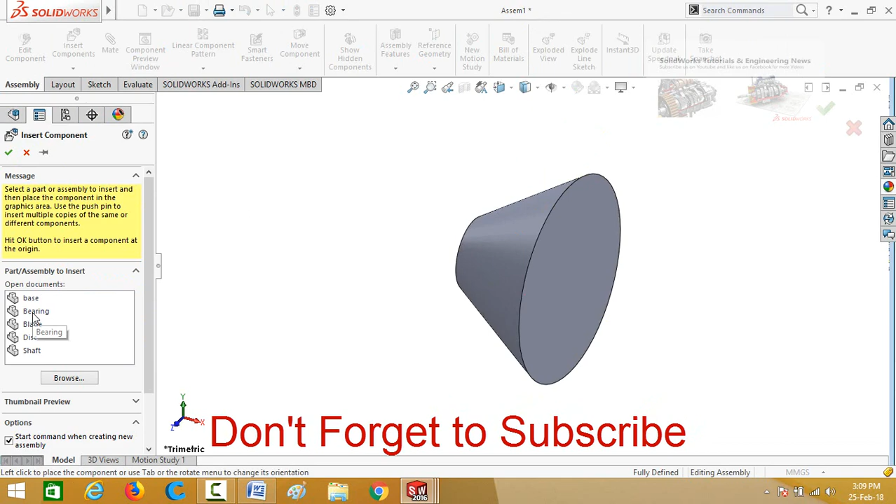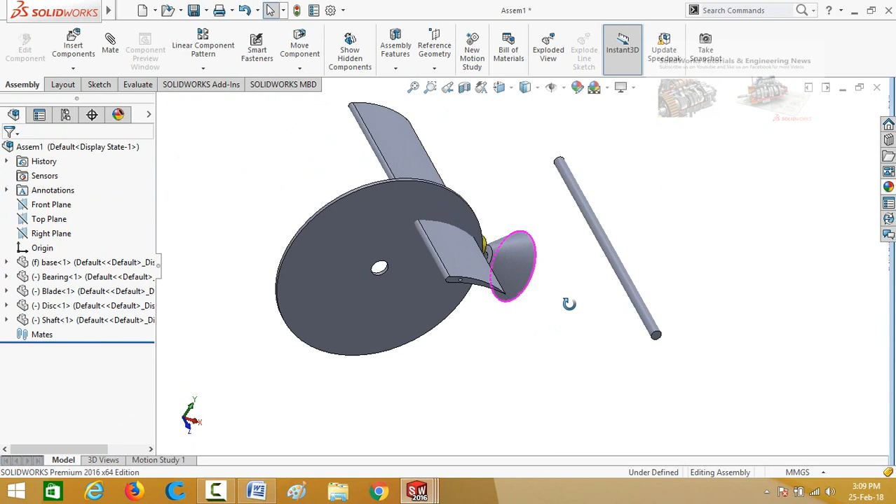Assembly, then import the rest of the parts one by one. Click on this cylindrical face of shaft and then select mate. Now select this cylindrical face of base and press this button to lock rotation. Now press OK button.

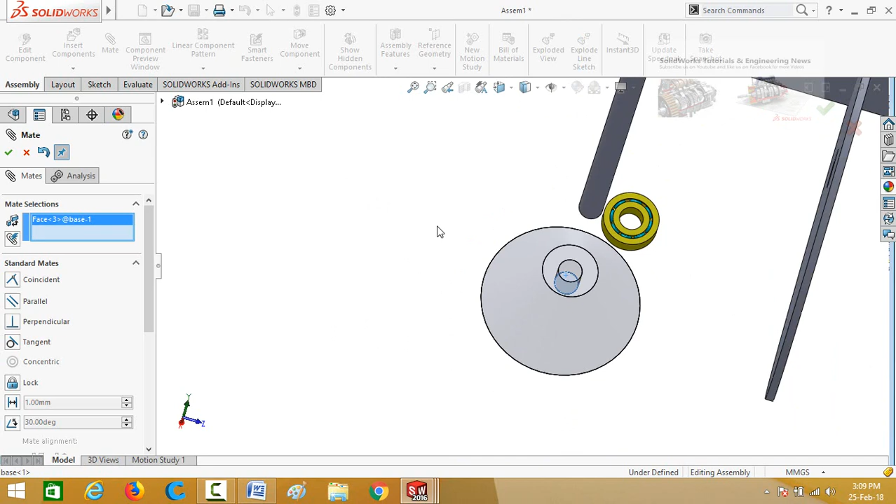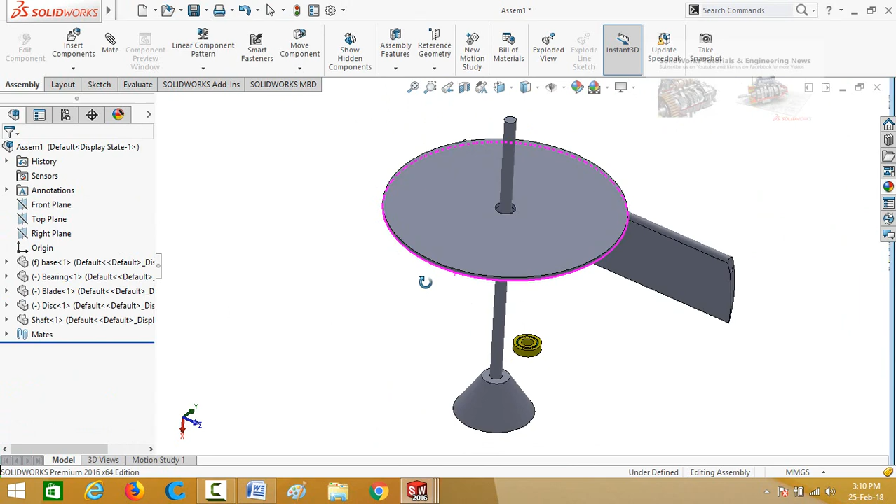Now select this face of base and then this face of shaft. Press OK button again. Select this cylindrical face of disc and then this cylindrical face of shaft and do not lock rotation. Press OK button. Again press OK button. Now we have to design the bearing bracket for this bearing.

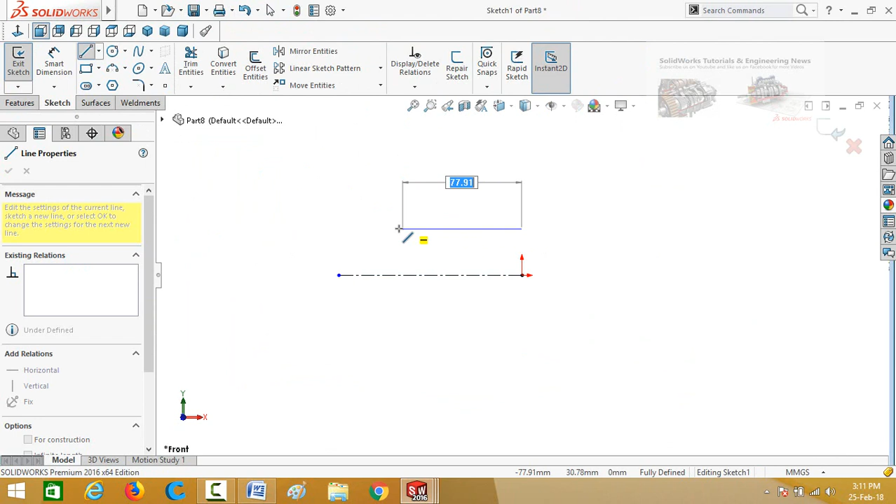So start from new part again. Sketch on front plane and then draw a center line started from origin. Now draw a line and close the sketch. Define the dimensions. This length is 10 millimeter. This diameter is 18 millimeter. This diameter is 35 millimeter.

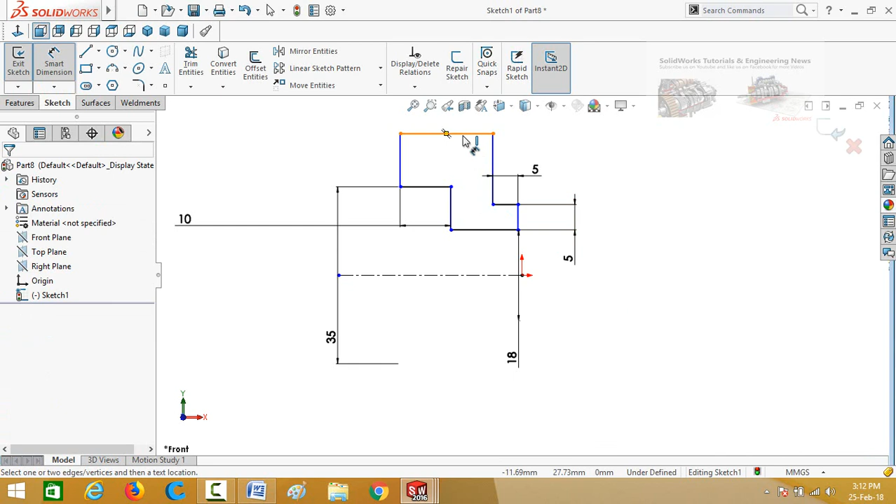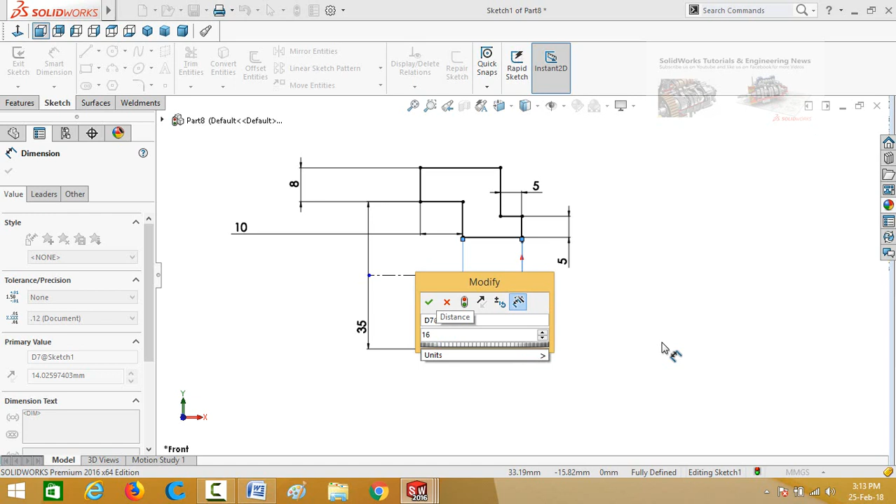This length is 5 millimeter. This length is also 5 millimeter. And this length is 8 millimeter. Press escape button and then select this point and then the origin, make their relation vertical. Now define this length, 16 millimeter. So our sketch is now fully defined.

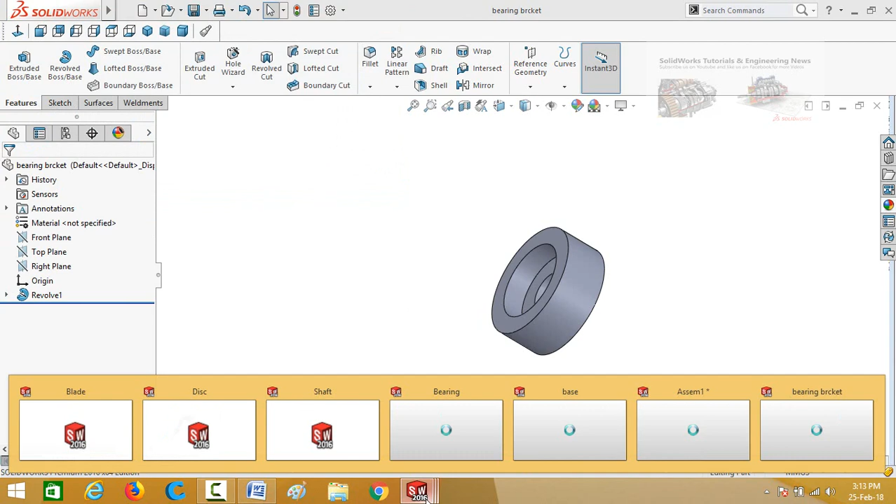Go to features tab and apply a revolved boss base command. Press OK button to apply this command. Save it as bearing bracket. Go to assembly and import this bearing bracket. Now we have to create magnet, so start a new part again and sketch on front plane.

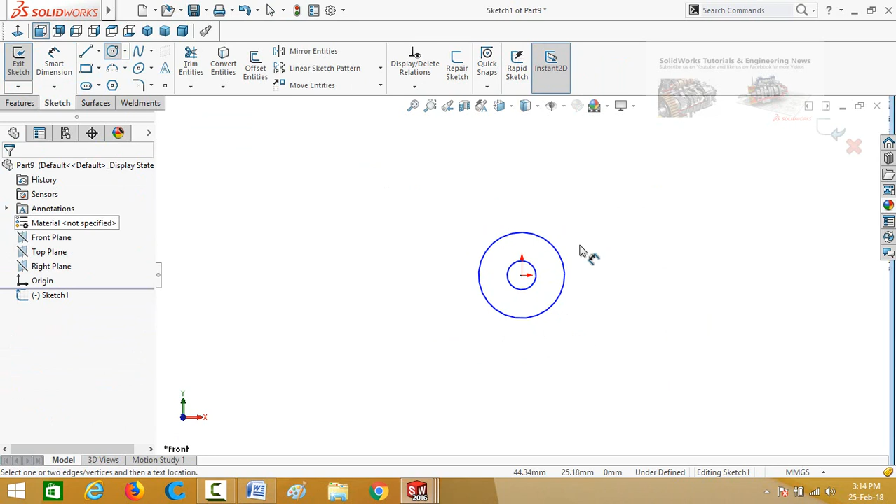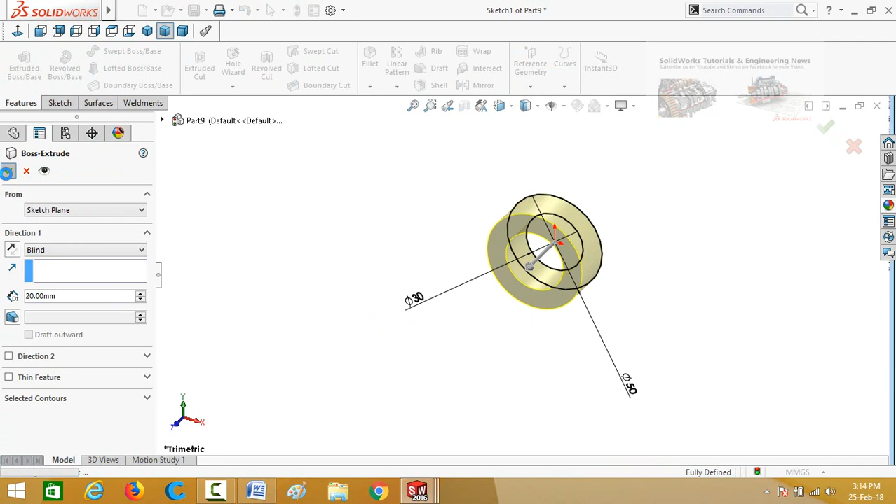Draw two circles, define them. Outer circle has the diameter of 50 millimeter and inner circle has the diameter of 30 millimeter. Press OK button and then go to features tab and apply extruded boss base command. Extrusion thickness is 20 millimeter and press OK button. Now save this part as magnet. Go to assembly and import the magnet.

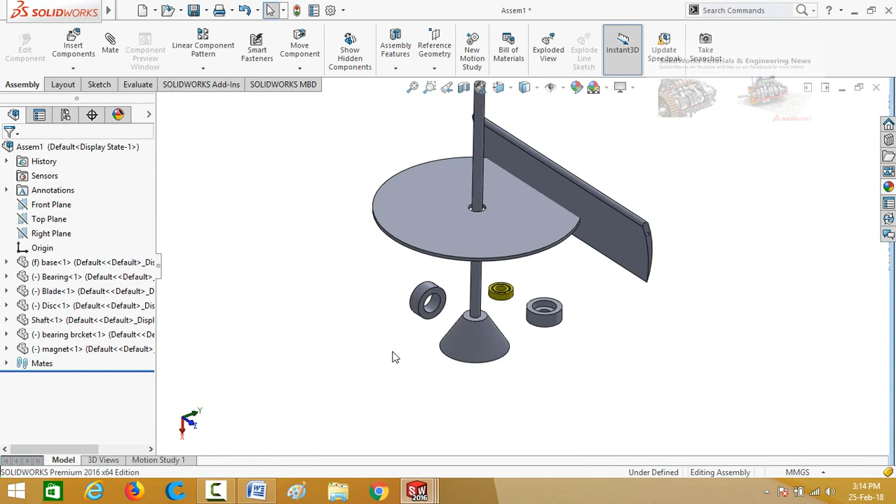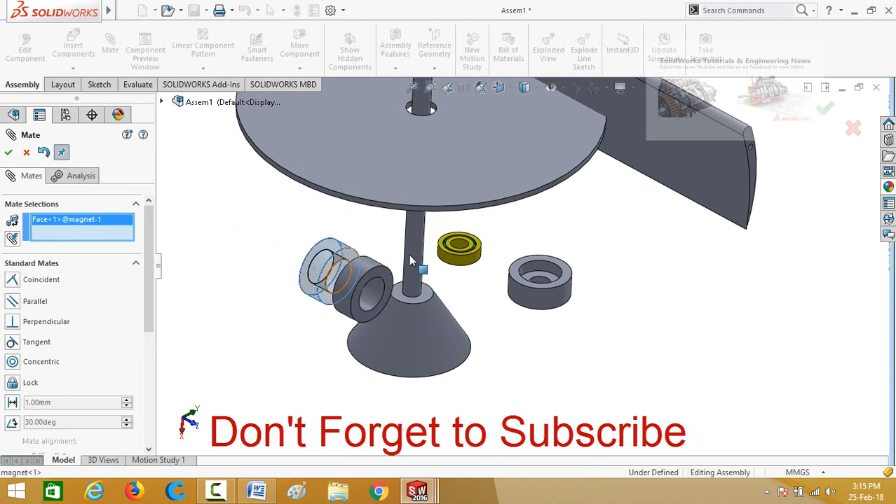Now assemble them one by one. First of all, we need two magnets. So press and hold control key and then drag the magnet to make duplicate. Click on this cylindrical face of magnet and select mate. Now select this cylindrical face of another magnet. Do not lock rotation. Press OK button. Again select this cylindrical face of magnet and then select this shaft's cylindrical face. At this time also do not lock rotation. Press OK button.

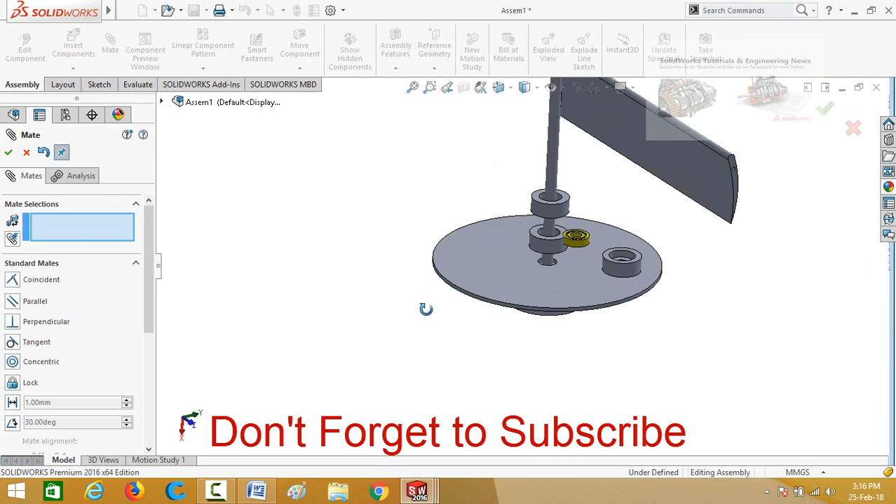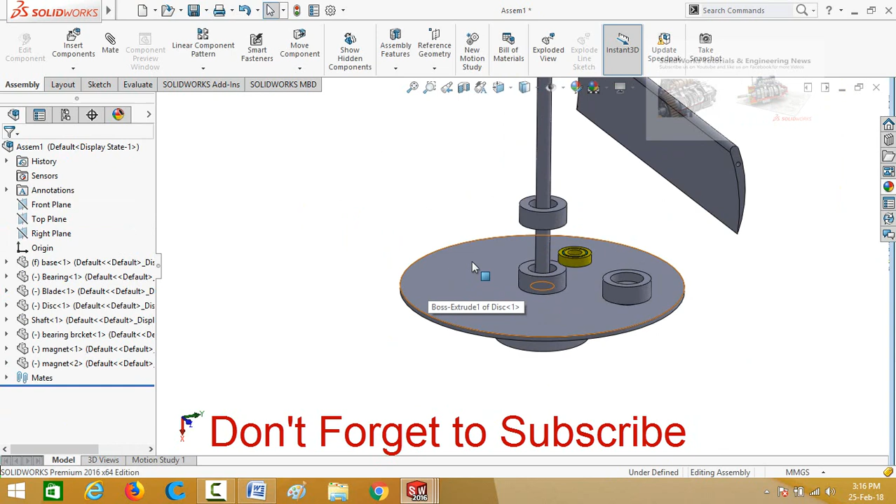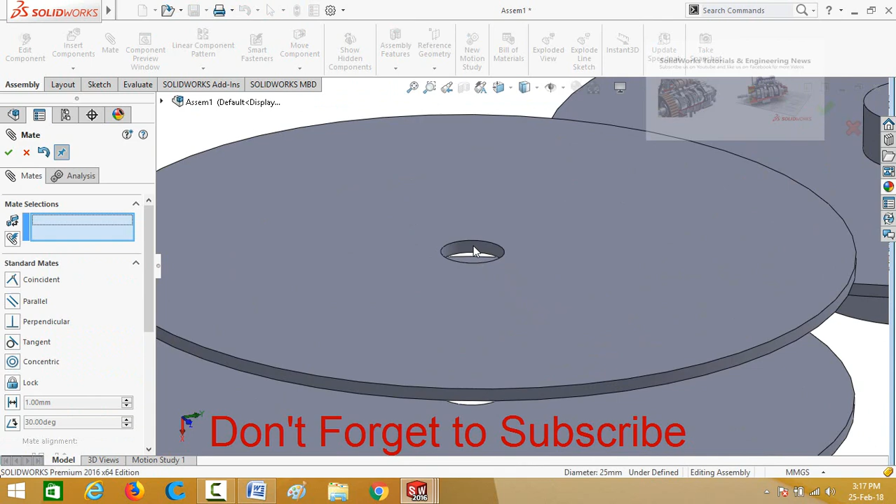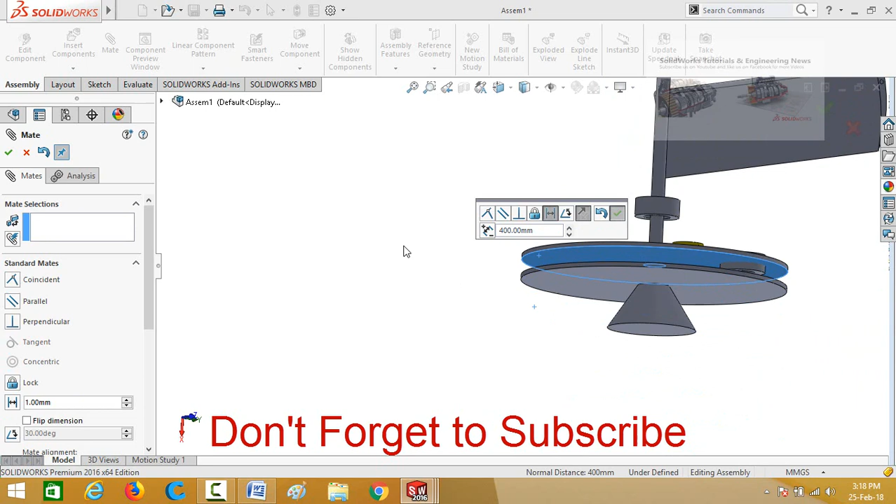Again select this face and then this face of shaft. Do not lock rotation. Press OK button. Now select this face and then this face of disc. Select distance mate from here and type the distance, which is 400 millimeter. Now press OK button. Now select this face of another disc and then select this face of shaft. Select distance and type the distance, which is 50 millimeter. Press OK button. Again press OK button.

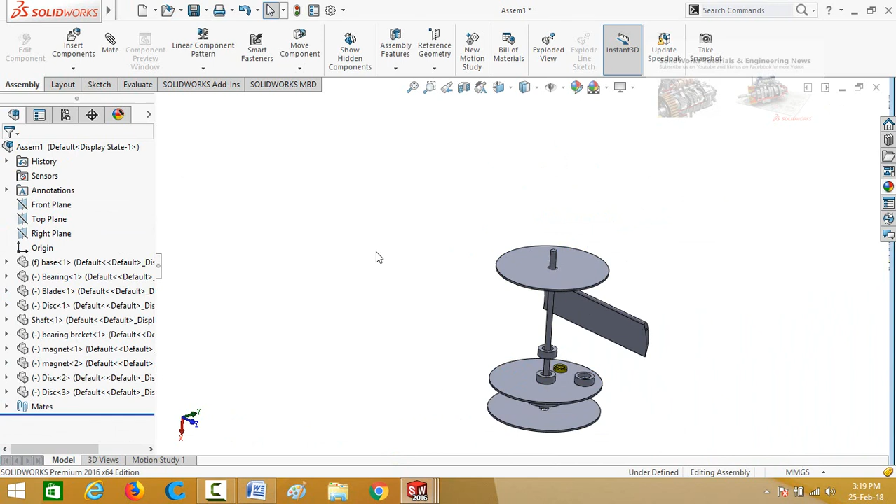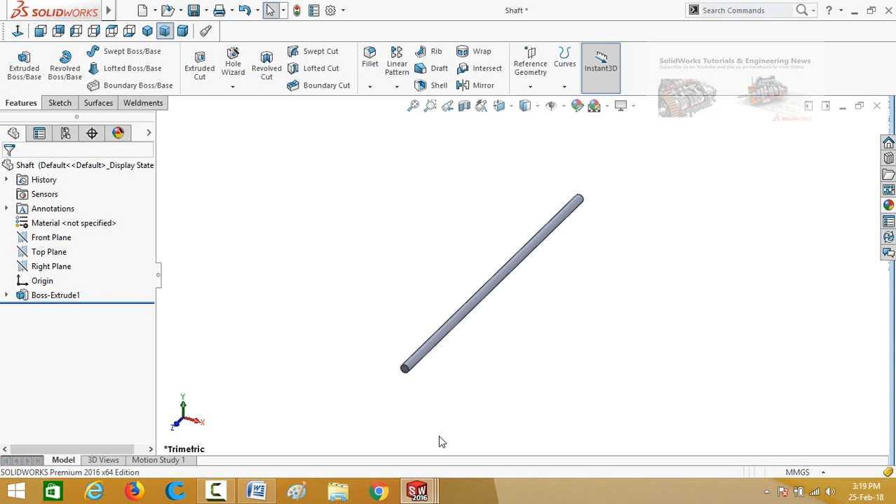Now we have to increase the length of shaft. So for that, click on the shaft and open it in a new window, and then click on this Boss Extrude 1 and select Edit feature. Type here the total length of the shaft, 600 millimeter, and press OK button. Now go to assembly once again. Now it's OK.

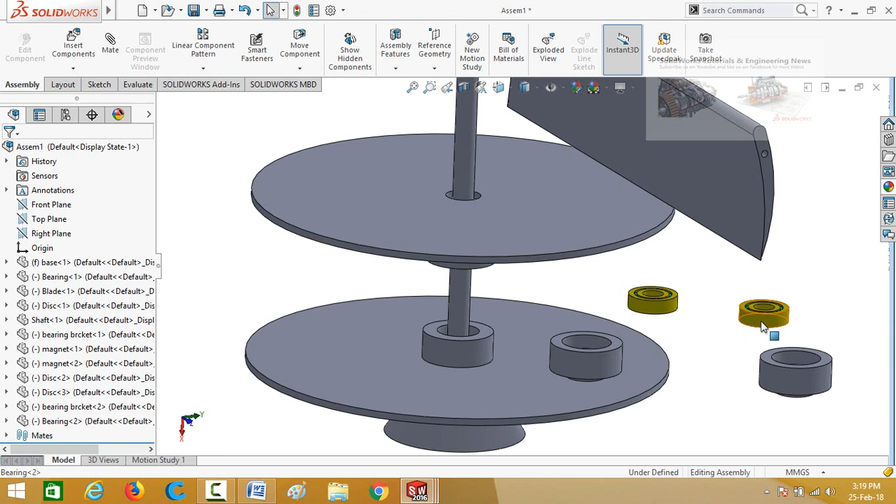Now it's time to assemble bearings. So similarly we need two bearings and two bearing brackets. So press and hold control key and drag the bearing bracket and also drag the bearing to make duplicates. Now click on this cylindrical face of bearing and mate it with this cylindrical face of bearing bracket. Do not lock rotation. Press OK button. Now select this face of bearing bracket and then select this face of bearing.

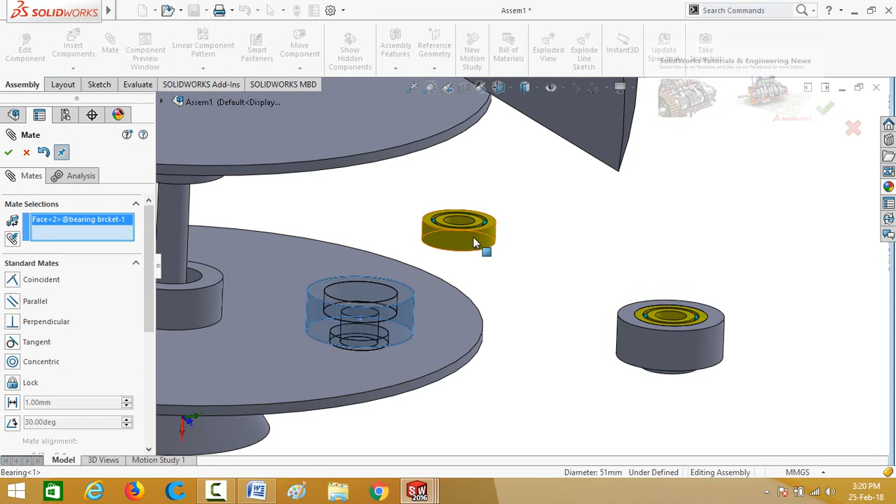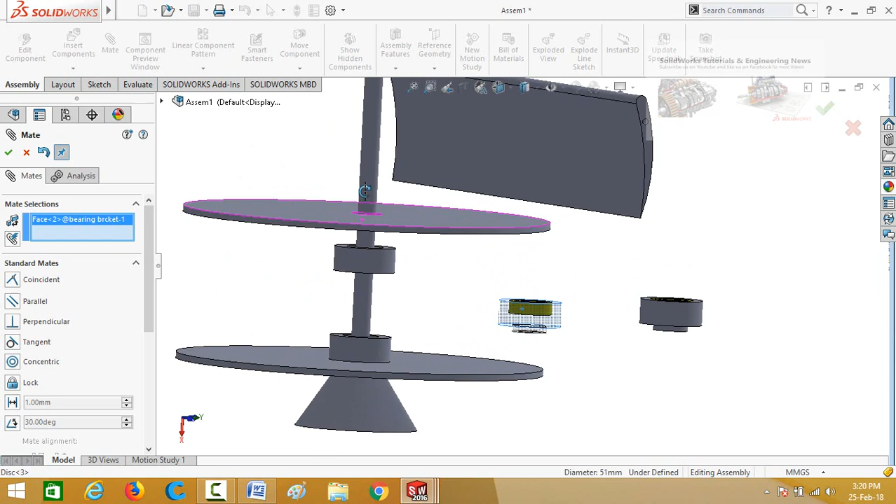Again press OK button. Now select this cylindrical face of another bearing bracket and then this cylindrical face of bearing. Do not lock rotation. Press OK button. Now select this face and then this face. Press OK button. Now select this face of bearing bracket and then this face of shaft. From here, flip mate alignment and press OK button. Now select this face of bearing bracket and then this face of disc. Press OK button.

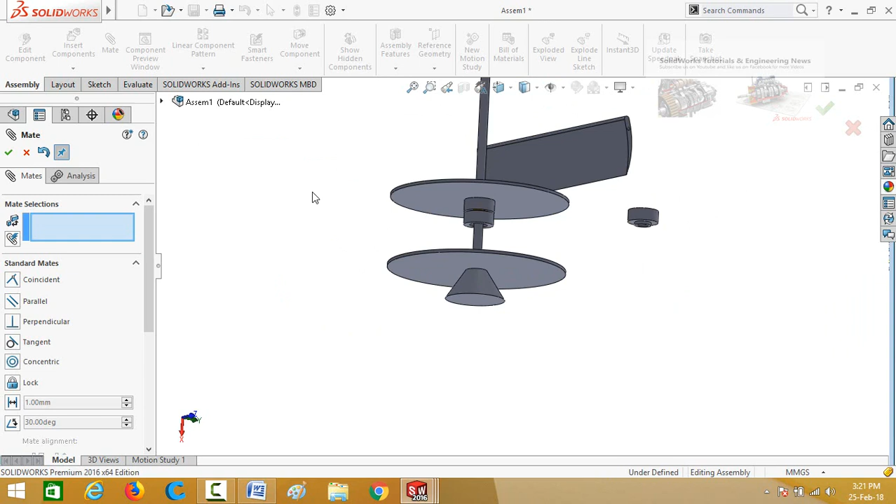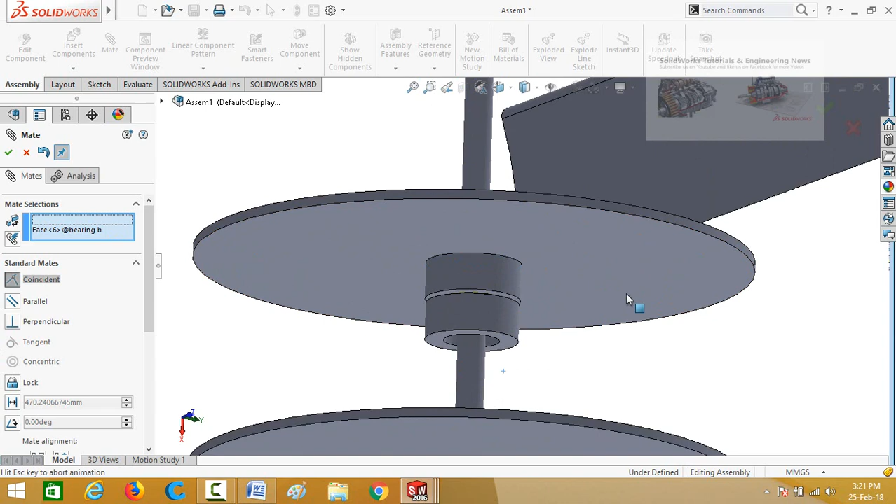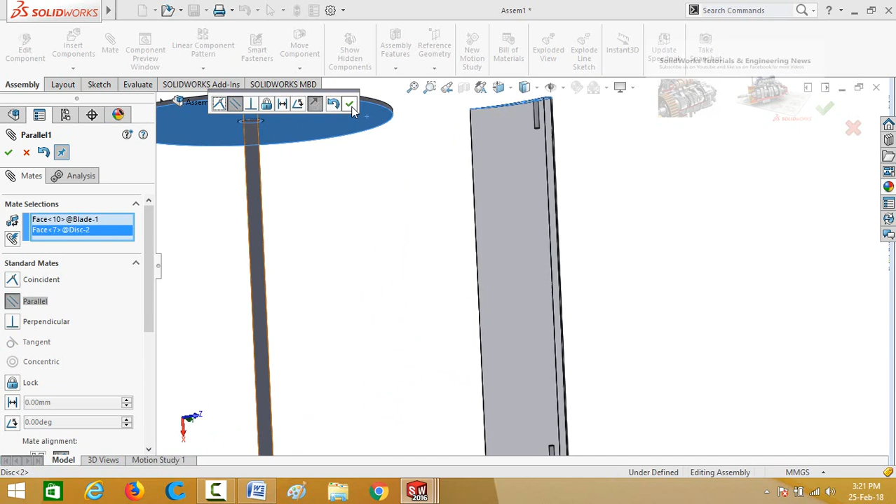Now select this another bearing bracket and mate it with the shaft. Press OK button. Then select this face of another disc and mate it with this face of bearing bracket. Press OK button. Now select this face of blade and mate it with this face of disc. Press OK button. Similarly for the other side, press OK button. Again press OK button.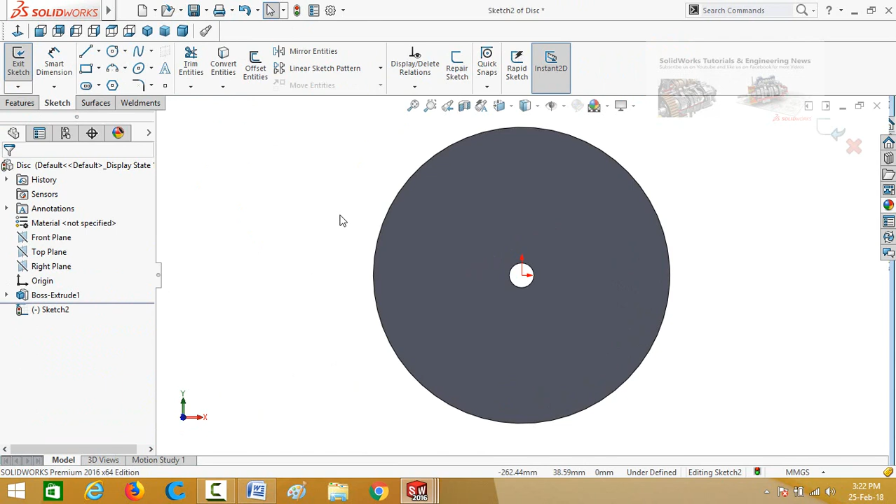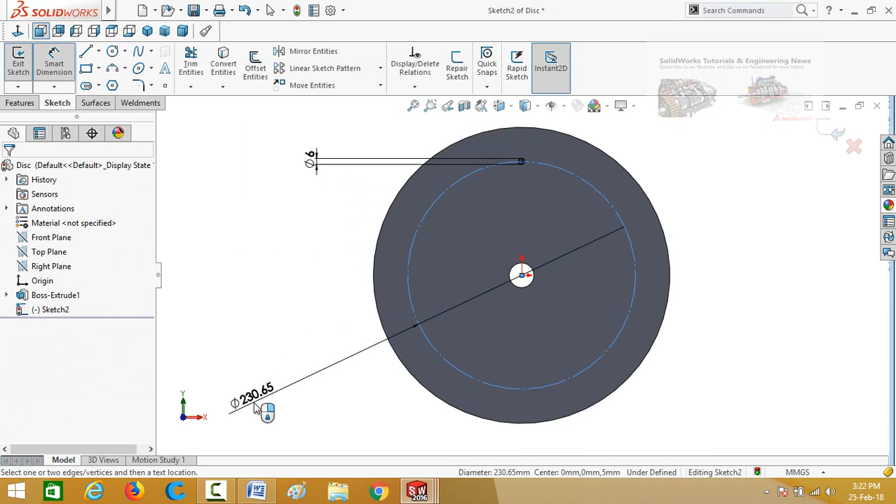Now we have to create holes on the disc to mate with this hole. So for that, click on the disc and open it in a new window. Then click on the disc and then select sketch. Make normal to and draw a circle. Start it from origin. From here, check this box for construction and press OK button. Again draw a circle on this quadrant. Now define. This diameter is 6 millimeter and this diameter is 250 millimeter.

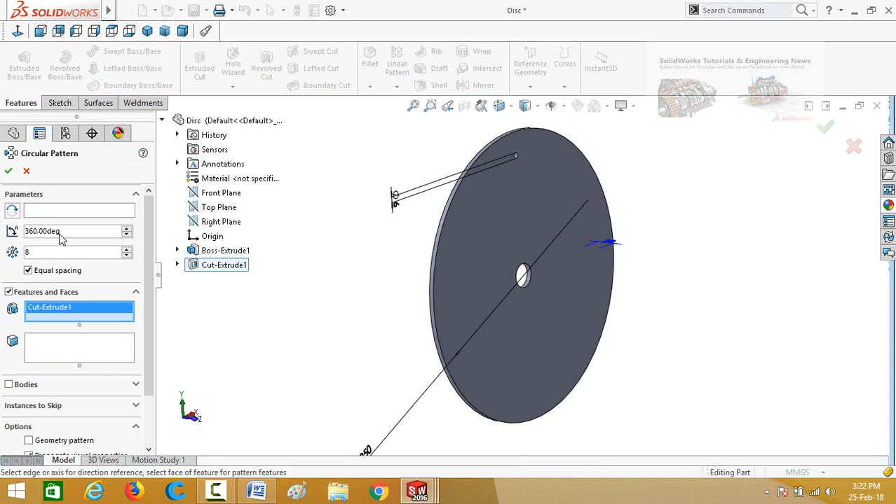Go to Features tab and then select Extruded Cut command. Press OK button. Now click on this arrow below the linear pattern and then select circular pattern. Drop down these options and then select Cut Extrude 1. Now click on this box pattern axis and then select this circular edge. Type the quantity, which is 3, and press OK button. Save it and then go to assembly.

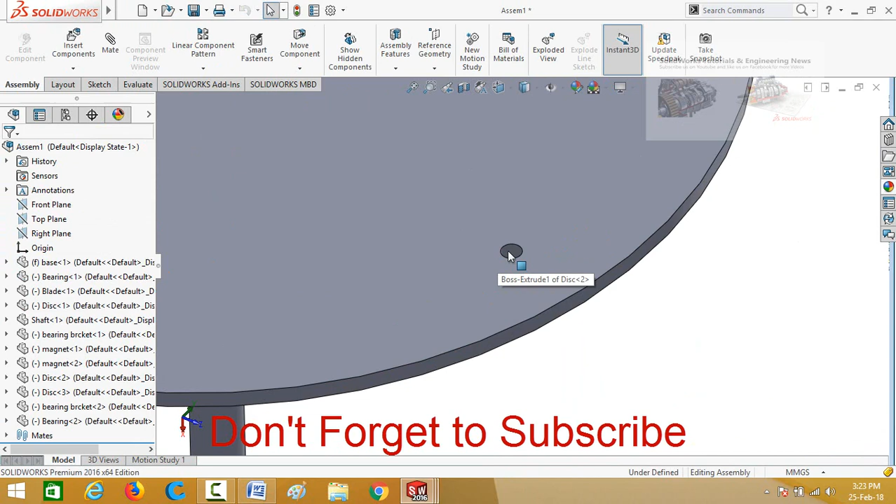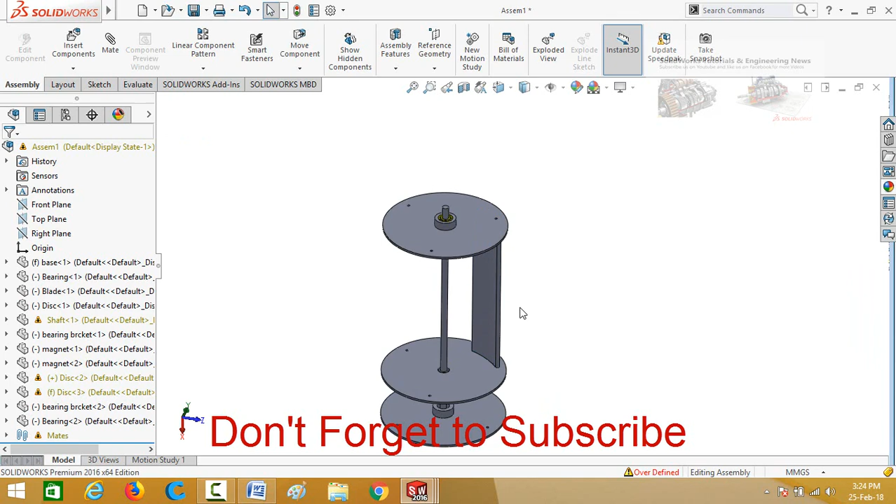Now click on this circular or cylindrical face and select mate. Then click on this hole and press OK button. Again press OK button. Now manually adjust the angle of the blade. So better if you right click on the disc and then select fix. Close. Now adjust the angle. Again right click on the disc and then select float.

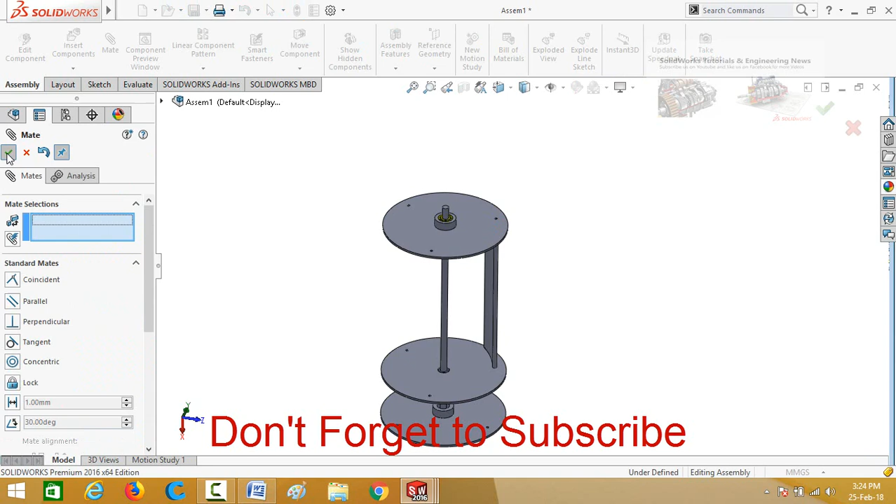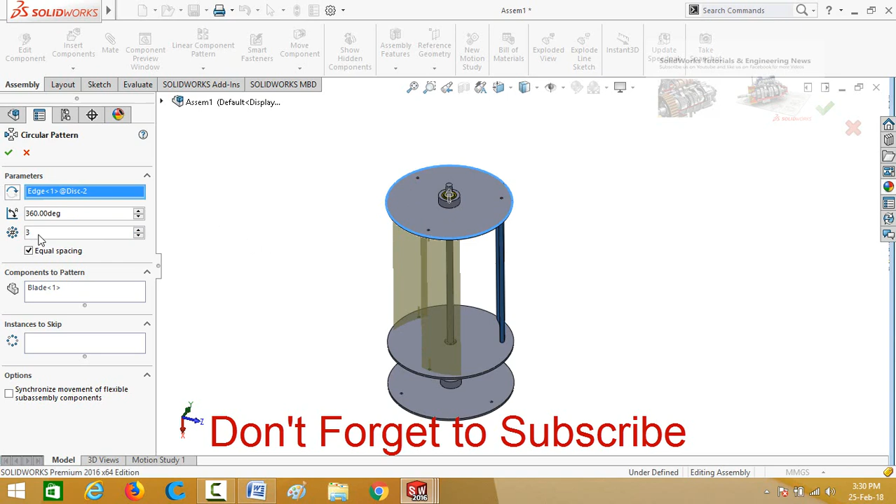Now scroll down from here and drop down mates option. From here select concentric mate and then edit feature. Now lock the rotation and press OK button. Again press OK button. Now click on this arrow below the linear component pattern and then select circular component pattern. Select this blade as components to pattern and then click on this box pattern axis. Then select this circular edge. We need quantity 3 and check this box equal spacing and press OK button.

So on this disc, after manufacturing this maglev project, we will paste the magnets, and on this disc we will place the coils to generate electricity.